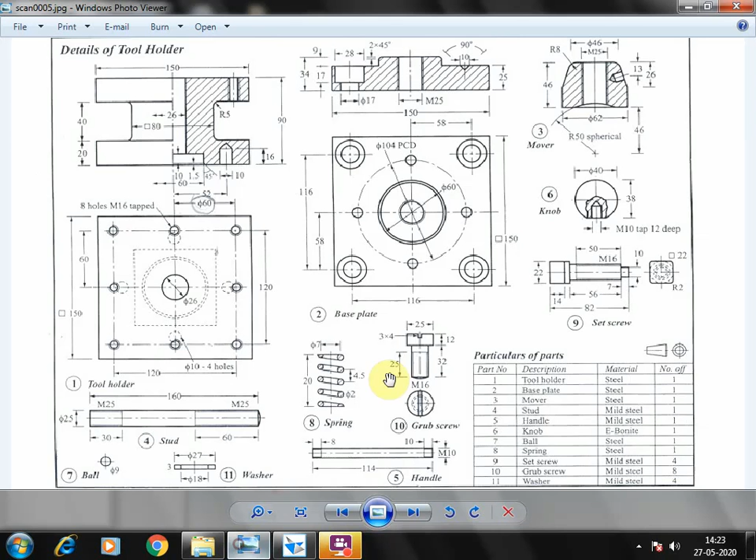Okay, so now I am going to start. Go to the solid part. So here I am going to the protrusion, revolved protrusion, select what is the value. So in the dia, in the bottom, so what is 62, up to the total height is 46.

The tapered length is 26 mm, middle is 25, so 46. So I am going to select a plane, front plane. From here to select a line. Then what is the 62? So 31, and going to make a line.

So okay, I will do after. So what is the next height? 46, and towards right I think 45, that also 46 and 26 mm length. So 46 means 23 now. So here to going to make a straight line in the distance of, so 46 minus 26 remaining is 20. So I am going to make 20 over here.

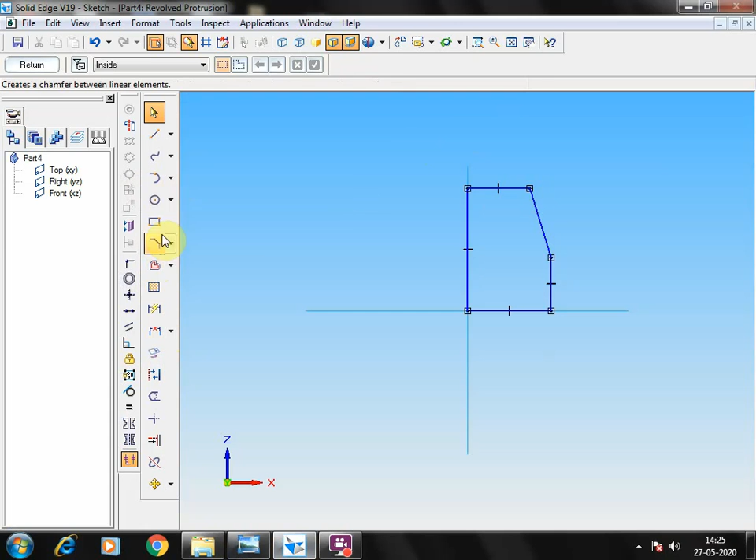As after that I am going to join. Now the top end they are making radius 80. Radius 8. So go to here, select fillet option, this as well as this. I am going to give radius as 8.

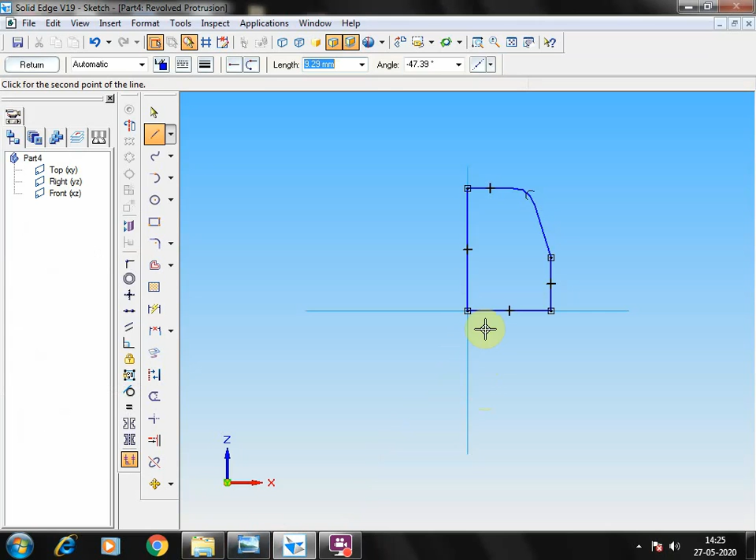So after giving this, once you see in the middle, it will be the straight tapered hole, so that I am going to select line from here to what is the tap 25, M25, or otherwise finally we can use with the hole option. So this is the basic step we have to do.

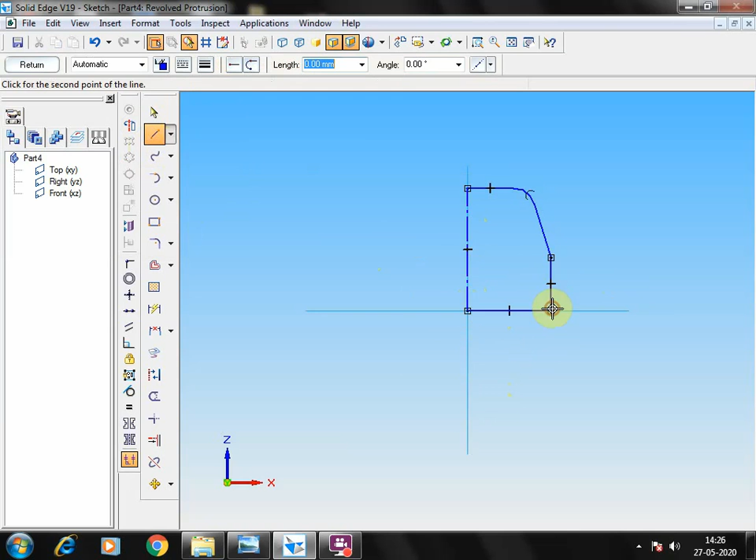Select axis of revolution in the mid, give return. So it's not joined, I think, properly. Select a line from the end, from here to here, then give return, 360. Okay, after giving 360, go to the hole, the top hole, threaded hole, go to here, threaded, having 25 mm diameter.

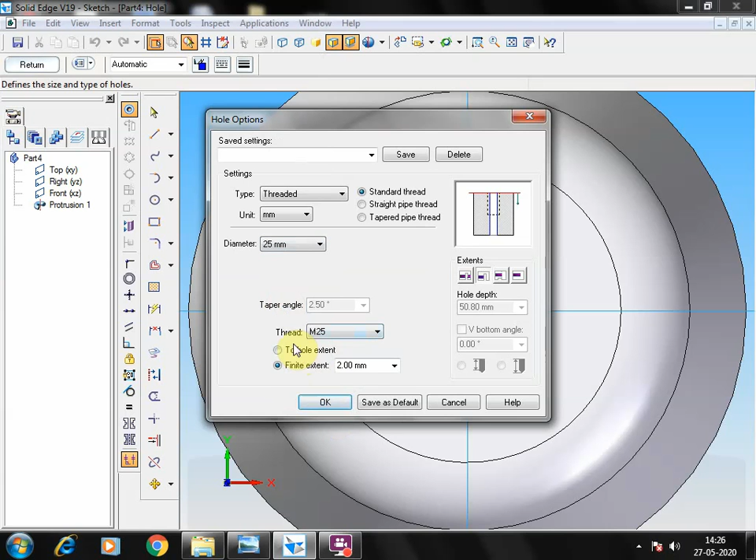So 25 mm diameter, threaded to hole extent. Okay, through next return, left and right click. So the tapered threaded hole created.

Then comes to the next one, this spherical radius 50. Okay, so from here to the center is 46. So go to here, select revolved cutout, select mid plane, from here to 46 mm distance, then select circle having the diameter.

Not diameter, radius 50. Then I'm going to do one more step. So extend to next.

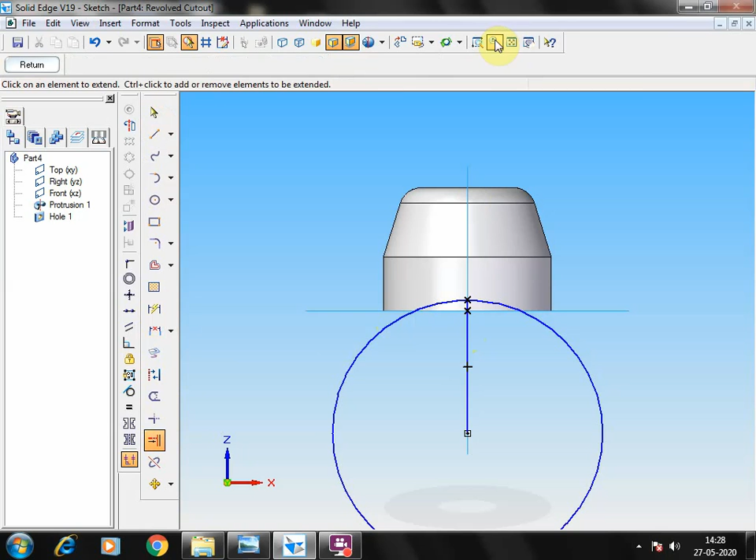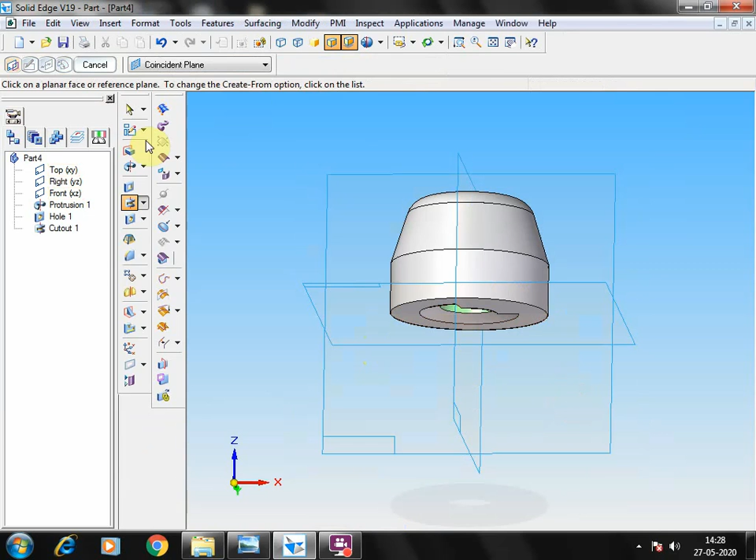Go to here, zoom option. From here to I'm going to make a straight line, so the remaining lines I'm going to trim. Now select axis of revolution, this 360, and those particular area is created. So only off.

So go to edit profile, return. So angle I can give 360, left and right click. So this is the surface I have to create.

So this part name is mover. Going to save.

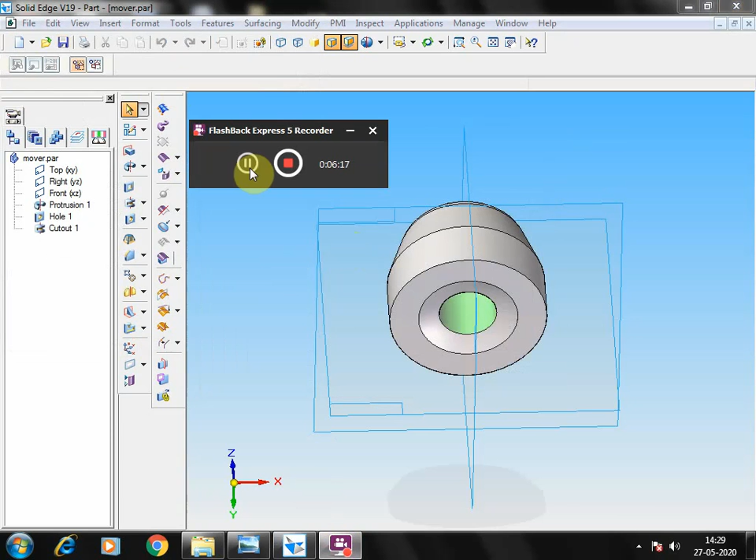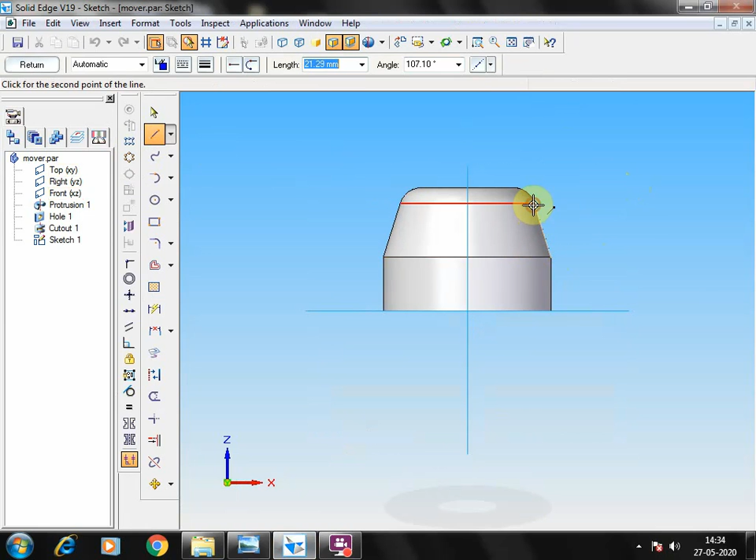So after this we are going to make this hole. Okay, so for this I'm going to go to the sketch option and to select this particular plane. I'm going to draw this line towards here. So what is the thing you have to remember? From top to 13 mm distance, as well as this axis of hole is perpendicular to this taper angle.

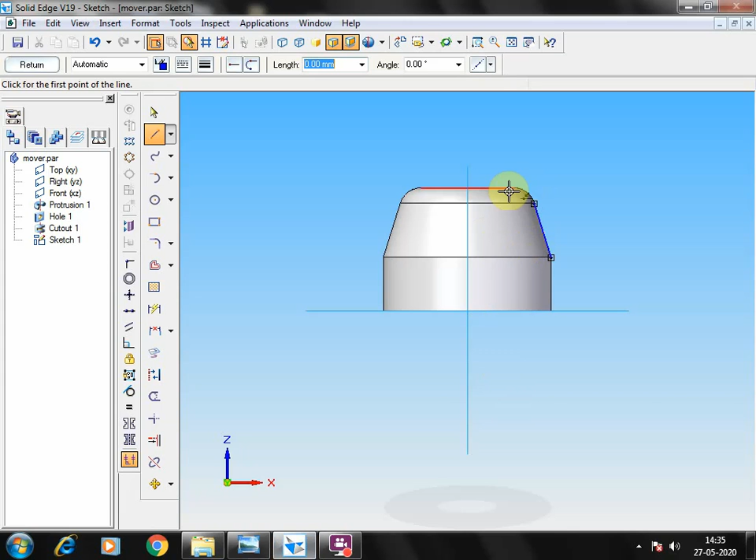Okay, so that's what. So I'm going to make a line, straight line from here to 13 mm distance. So straight line, going to select trim, going to cut over here.

Now I'm going to check what is the angle of this, 107. 107 plus 90, 197.10. So from this end to angle I can type 197.10.

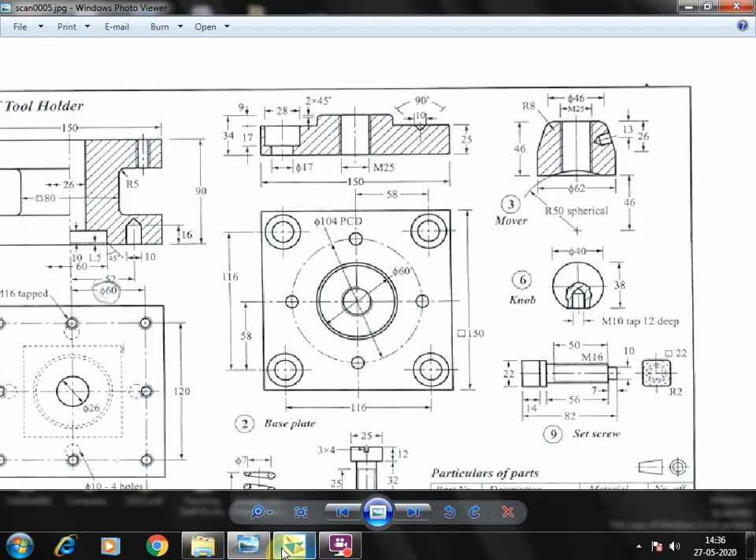197.10, and length, depth of the hole, diameter or length of the hole, length of the hole, now. So here the hole depth we could not able to find out with help of this drawing.

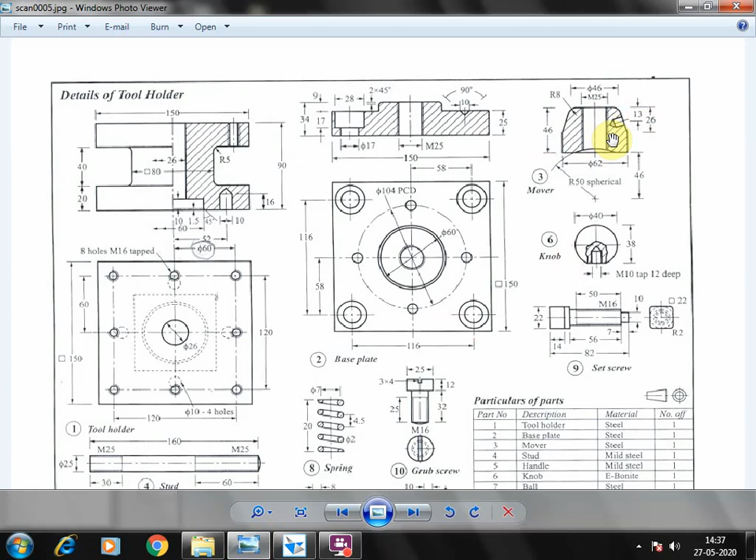So now here we are going to insert the handle. Okay, so those handle length, so here, so that comes as a 8 mm distance. This side is 8, so other side 10. So those it will be going to join with here 10 mm. Okay, so this length you should join with, make it as 8 mm.

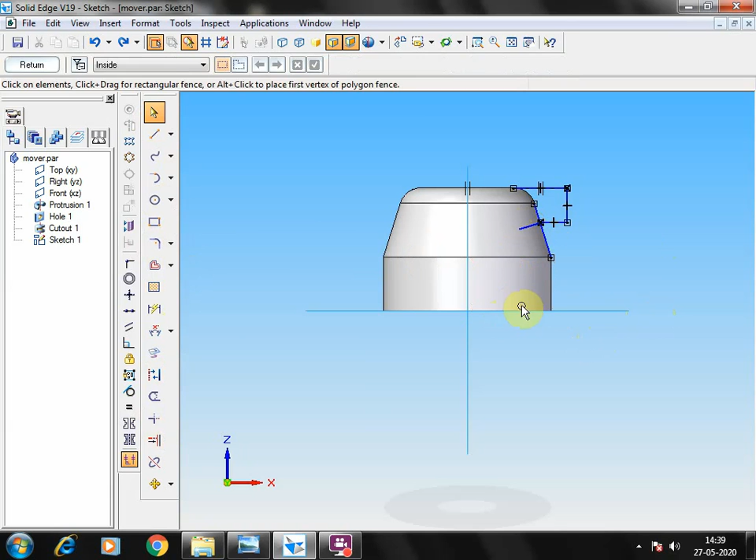Okay, so select a line from this end to 8 mm and 197.10. Okay, so now we will going to check the angle. So the angle between this and this is not exactly. So angle of this line.

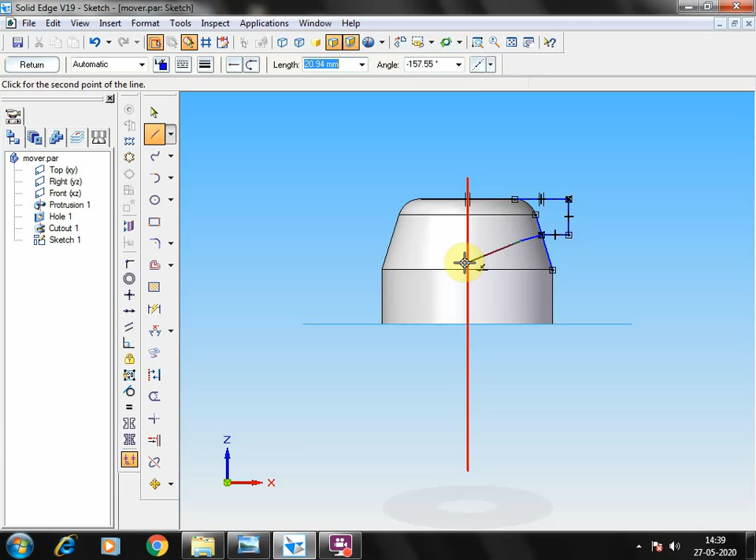So select zoom option, sorry, here the angle it could change. So select, delete line, 8, 197.10, 197.10.

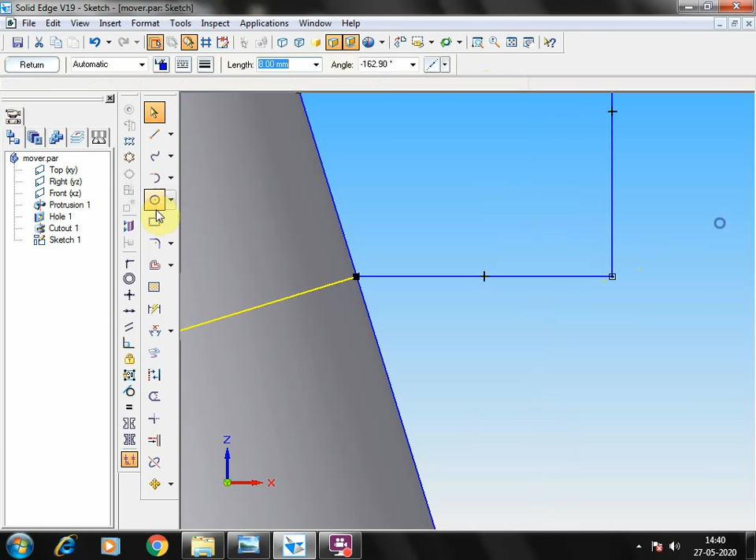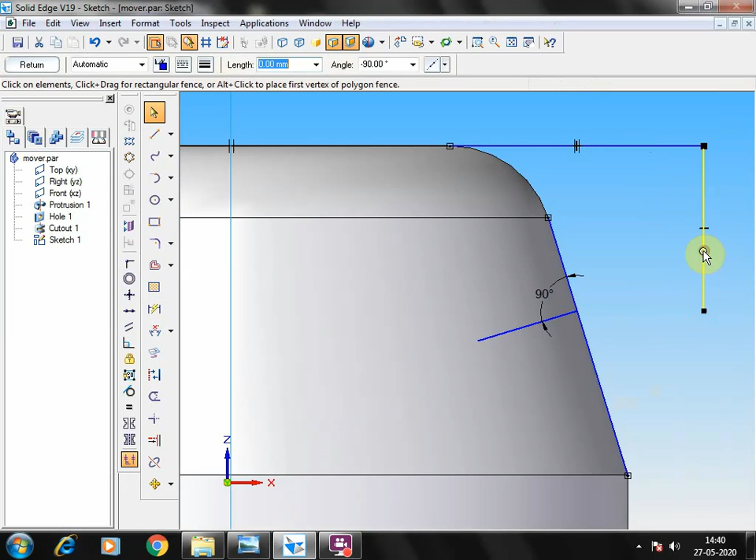Okay, so it is minus 162. Then comes to here, check the angle, so 90, so it's correct, whatever things we have drawn. Then finish, and actually I'm going to edit those things because of this line and all.

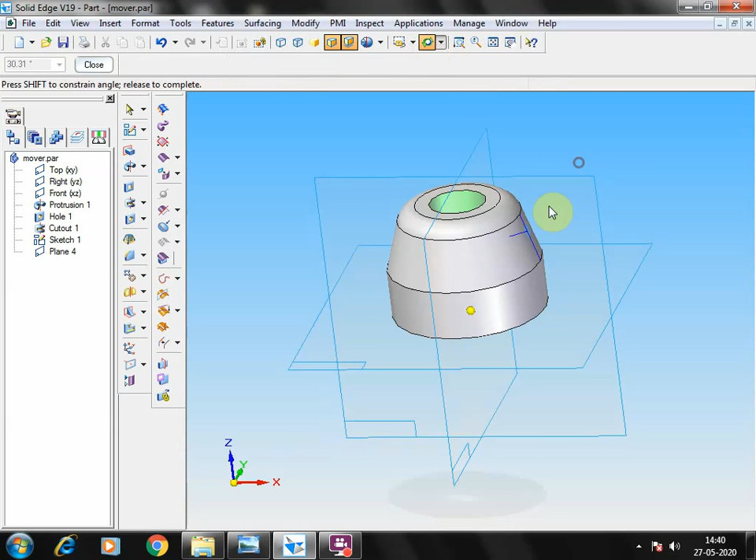I don't require this as well as this now. So the newly created plane line, I'm going to create the new plane like plane normal to curve from here to this end. I'm going to keep. So after that, rotate, select, zoom the particular area, and going to draw the whole circle with the help of sketch.

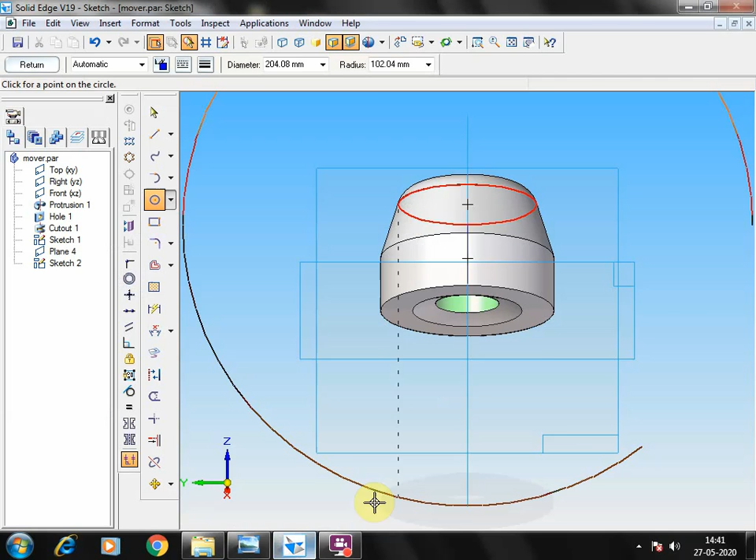Select a circle exactly this end. I'm going to make the radius, dia is 10 mm, because here it should full 10 mm, so 10 mm. Then return, so mismatched. So please be careful while drawing this.

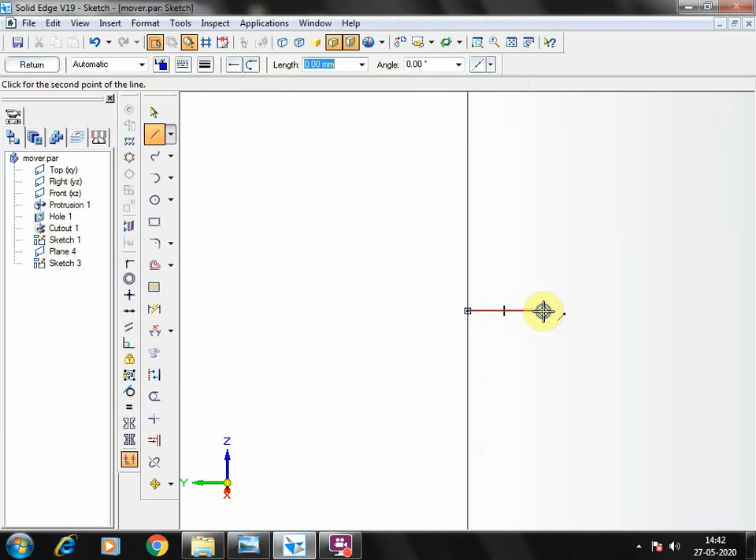So sketch I am going to delete, go to here, select sketch plane. So this is the particular point. Okay, so for reference I draw in a small line, select a circle from exactly here 10 mm, then fit.

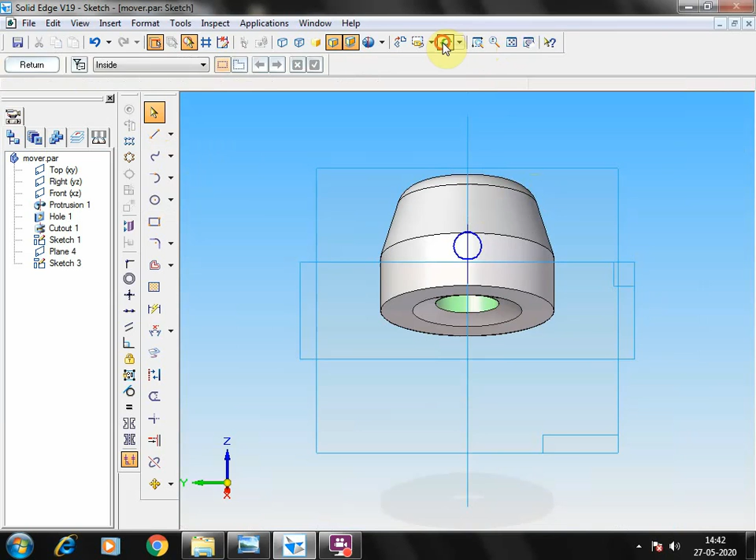Zoom, so those line going to delete. Okay, so now we will check. So exactly in the particular line we drawn. Then comes to here, return, and goes to

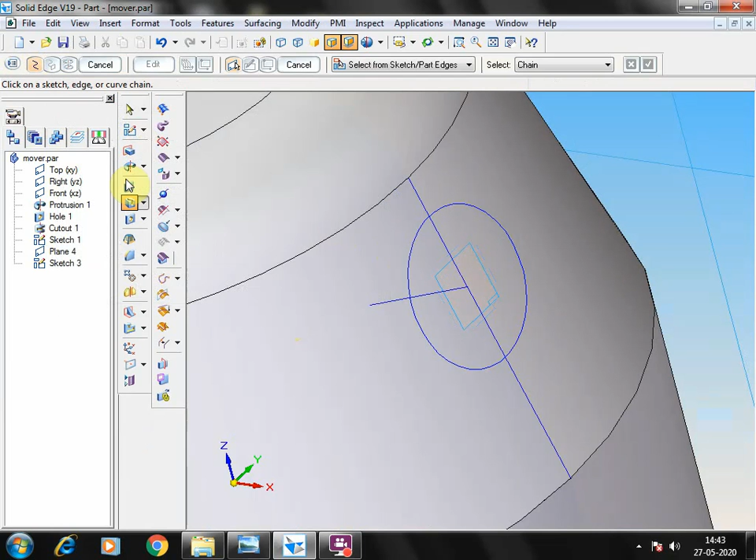threaded swept cutout single path. Okay, now select the guideline. So this is the guideline. Enter profile this. Okay, okay, so full on right click. Otherwise you can select the whole option, we can do also, it's not an issue.

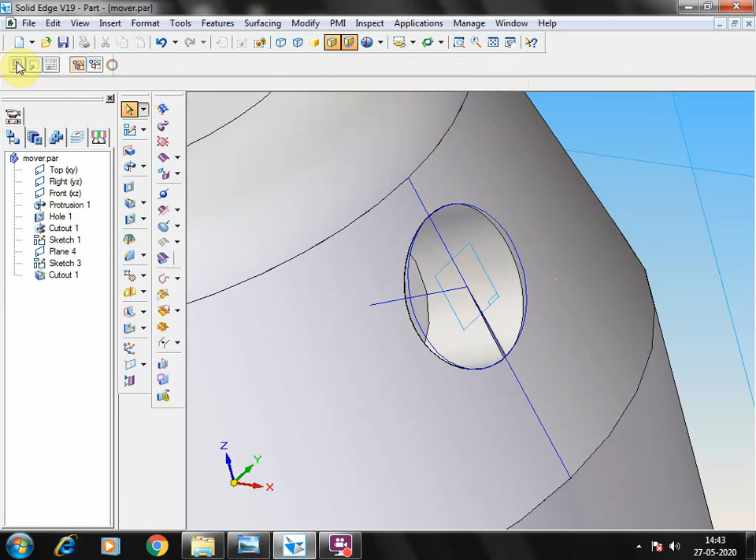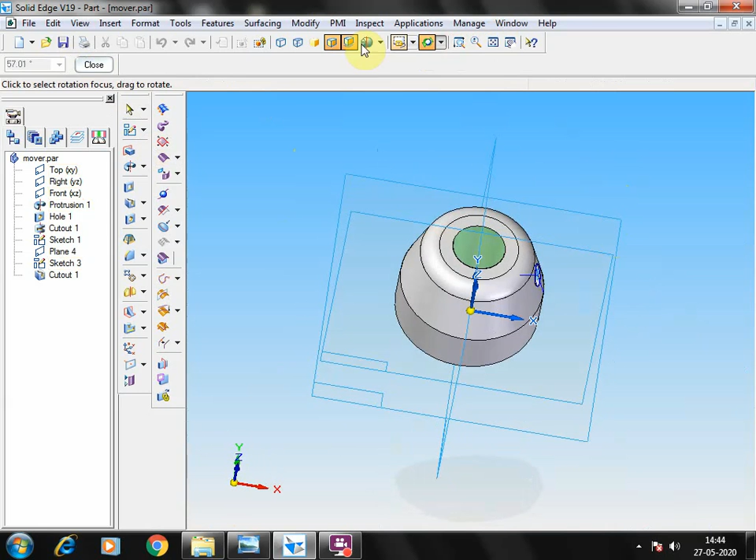So then we can save the component. So in this one, this is the only thing somewhat it is difficult. Okay, so once if you done this, okay, save and close it. Save and close the component. Then comes to the next, fourth one, stud.

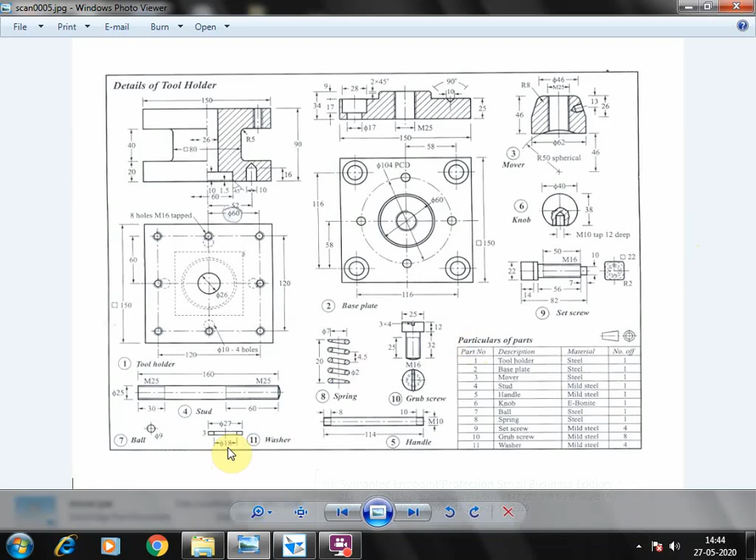So select solid part, protrusion, go to here, select by 18, select a circle from here to 27 mm, 27, return. So this depth is 3 mm.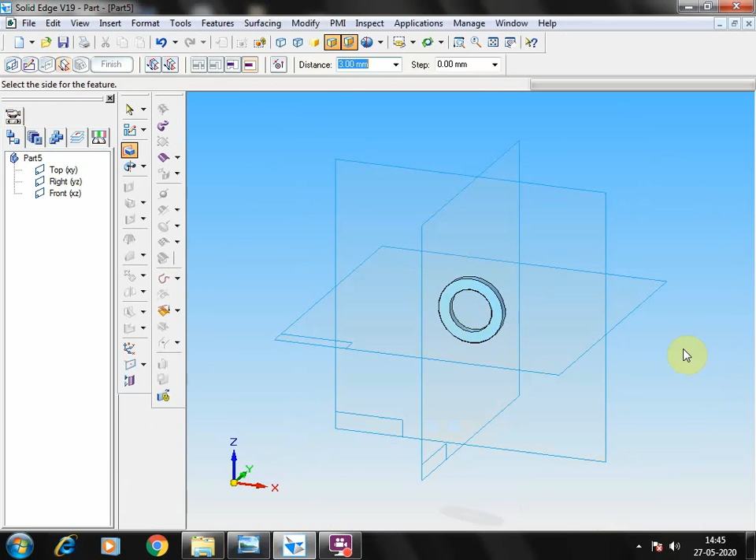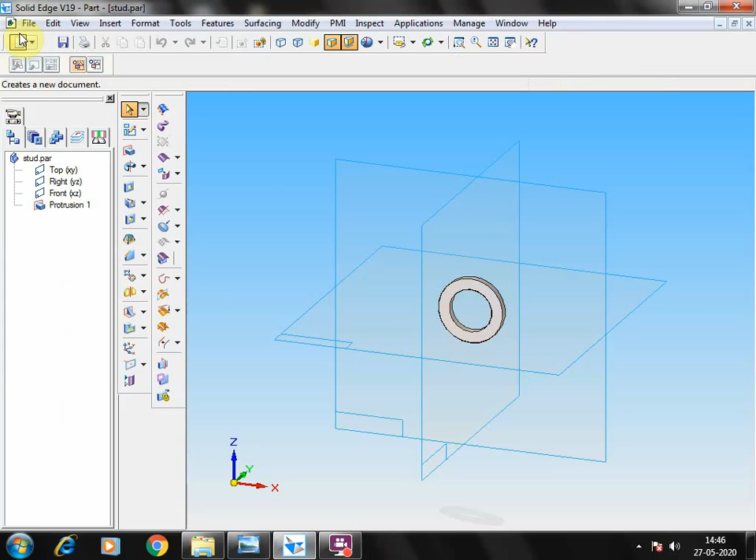Okay, so save as stud. Save as stud. So this is washer. Okay, so we can save this as a washer. Set here washer. You can save, then close, go to the solid part.

Stud is this one, so that is by 25 mm hole up to the length of 160 mm. Select and 25 mm circle, depth is 160. So this what happens if you are not possible to make this and this area only the threading, so all the area we can get.

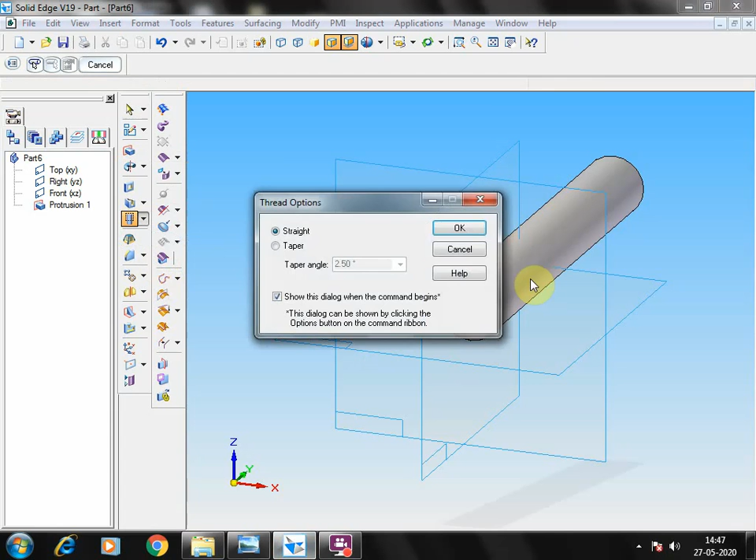So go to here, I'm going to select thread option. Okay, from starting from here, first I'm going M25, so 25 mm and length 30, so 30 I'm going to give finite value 30, even though it has to be select, so it's not an issue. You can save as stud, stud, save.

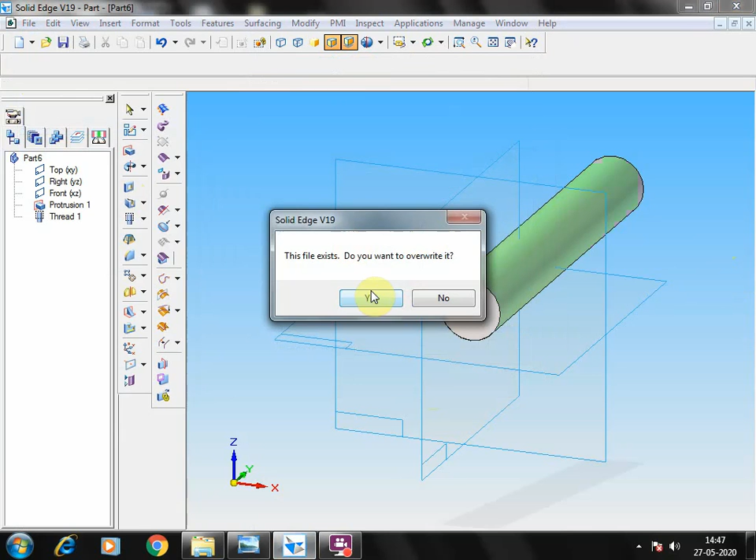Then comes to the next part after the stud. Fifth one is the handle. Where is the handle? So this handle diameter is M10 and 114 mm distance. Okay, so go to here, select protrusion, M10, so 10 and return.

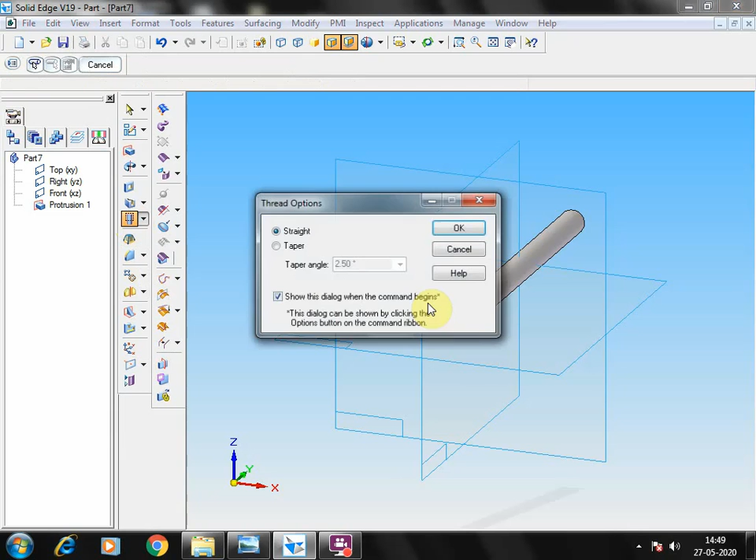114 mm distance, and going to select thread, give from here to 10 mm distance, finite value 10 mm, it's coming, so it's not an issue. So save as handle, and save and save. So handle is over.

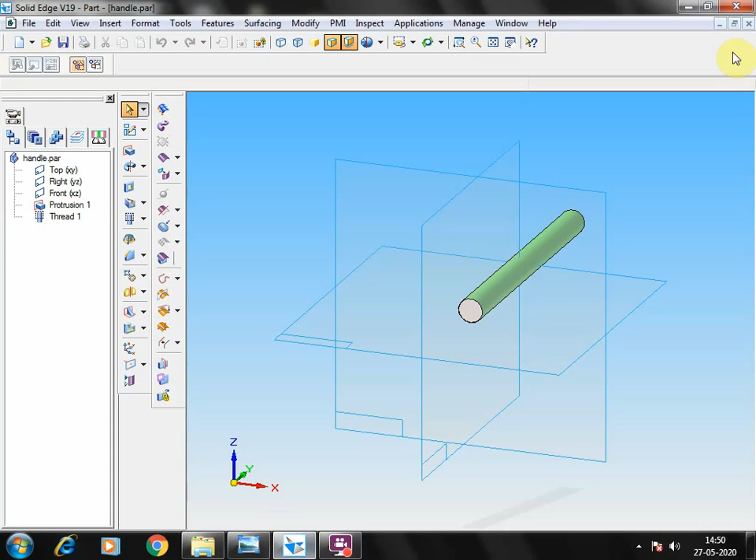Then sixth, so for the sixth knob, so sphere dia is 40 mm. Go to your solid part, select protrusion, not protrusion, revolved protrusion, select, and from here to draw a 40 mm circle, as well as from top to 38 mm.

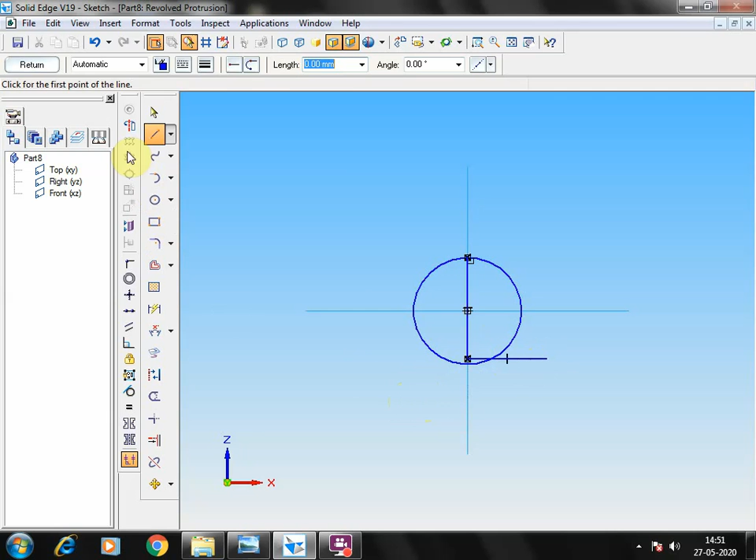38, and towards right side draw a line, as well as going to trim the particular area. This is the thing. Okay, now going to give axis of revolution, this return, 360.

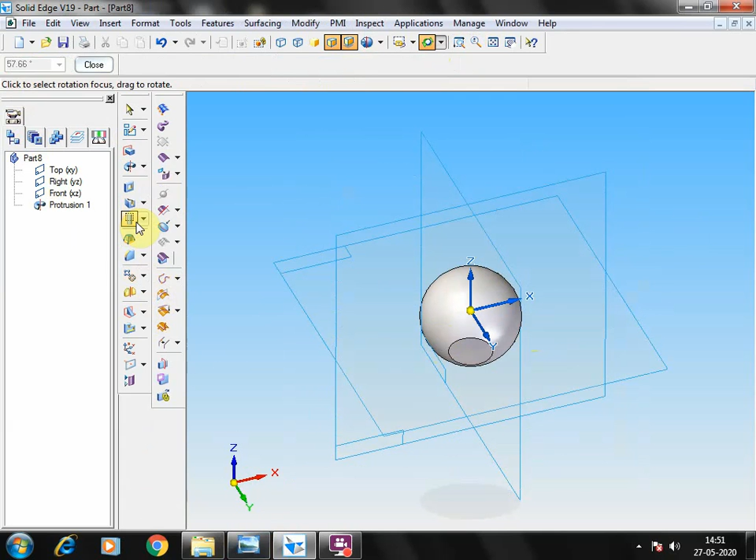Okay, so like this we have to create this particular part. Then goes to here, select hole dia 10 mm tap, 12 mm deep.

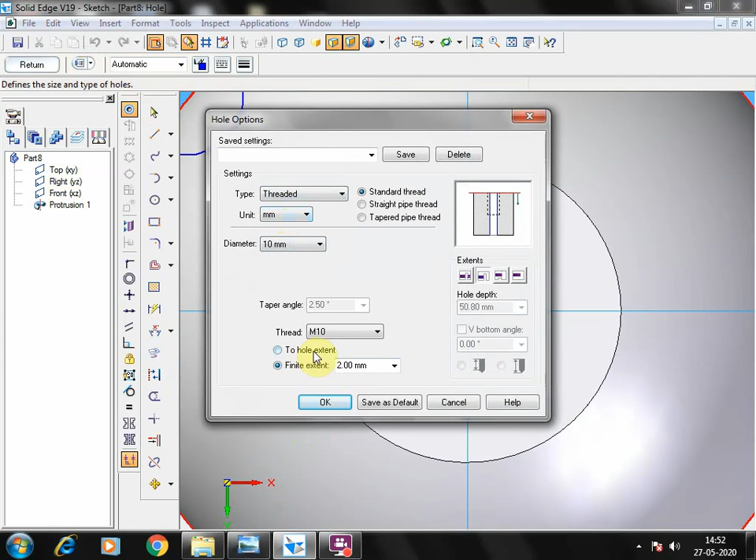Okay, so go to here, select. Actually this is the threaded hole, threaded 10 mm distance, and to hole extent, hole distance is 12 mm. Bottom, okay, 180. Keep going to place over here, then give return towards up, left and right click.

So this is okay, knob. I'm going to stay as a knob. Okay, this is over. Then comes into the next part after the sixth.

Seventh one is ball. So ball diameter is phi 9. Go to here, select solid part and revolve protrusion, and select a circle 9 mm and make a straight vertical line, trim it, the remaining portion. So go to here, trim.

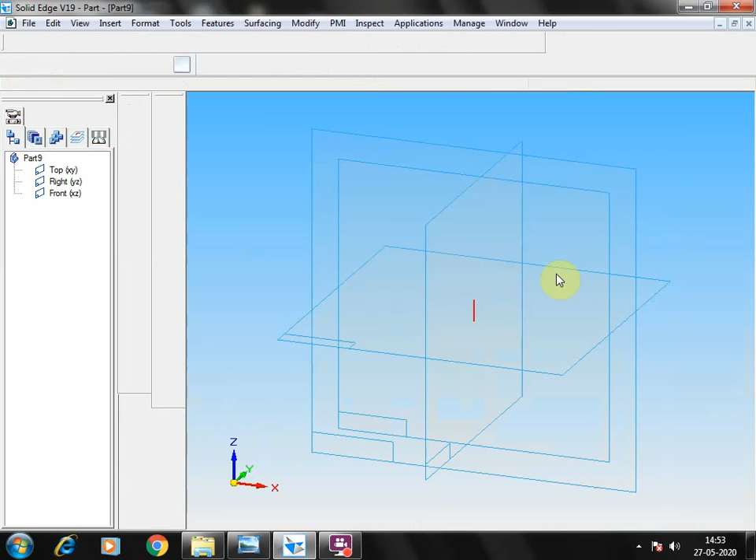Now select axis of revolution as this, return 360. So ball is created. So save as ball, BALL ball. Then comes to the next one after the ball, eighth one is the spring.

So for to draw the spring, please check the diameter of the spring is 2 mm, the distance is 4.5, 20 mm, the total distance is 7.

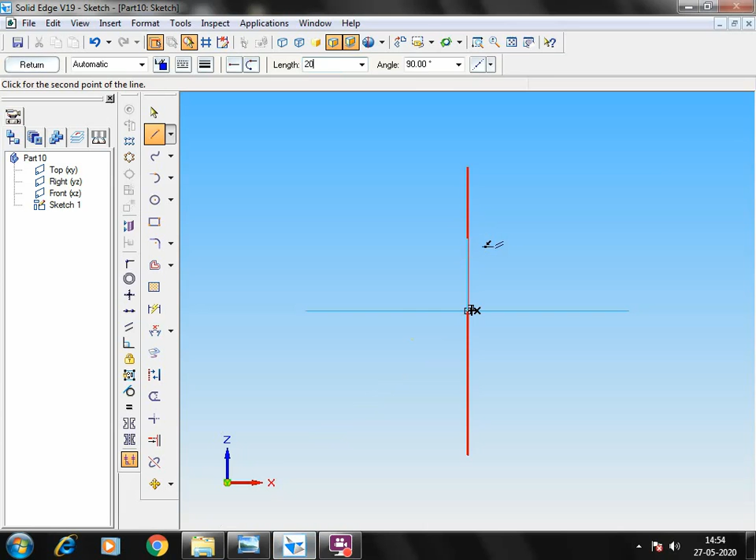So for this I'm going to solid part and sketch from here to the distance is 3.5, because in the 3.5 only the ball is coming. What is the height? Height is 20 mm. So 20 mm height, I drawn the line.

After drawn the line, select a circle. So this end phi is 2 mm. Okay. After that, this line I'm going to delete.

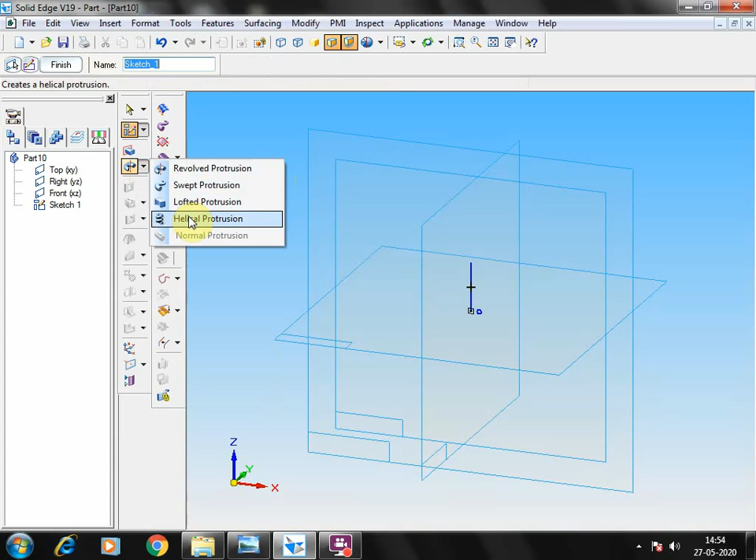Then coming up. So now go on, select the helical protrusion command. First I am going to select the profile and axis, then starting point from here, and pitch. That pitch length is 4.5. Okay, you see the preview and give finish.

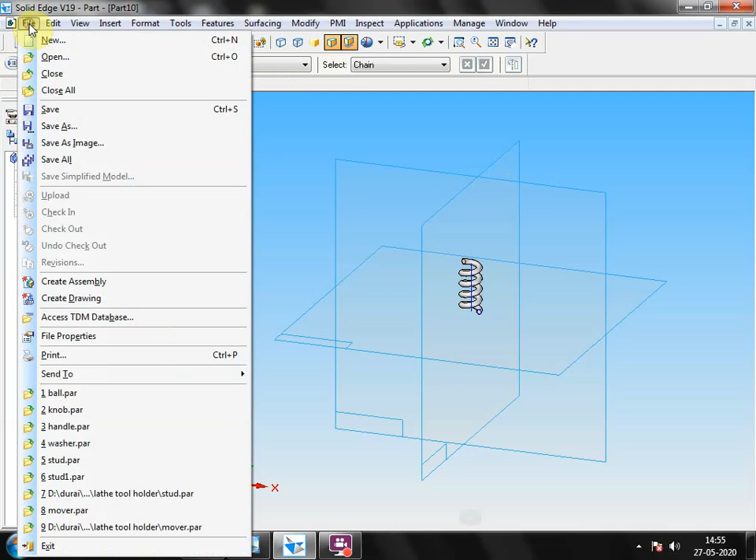So like this way we have to draw the helical protrusion. Helical, say one helical protrusion.

The next one is set screw. So set screw, the initial here will be a 22 square up to the length 14 mm. So go to here, select solid part, protrusion square 22. Select a line from here to 11.

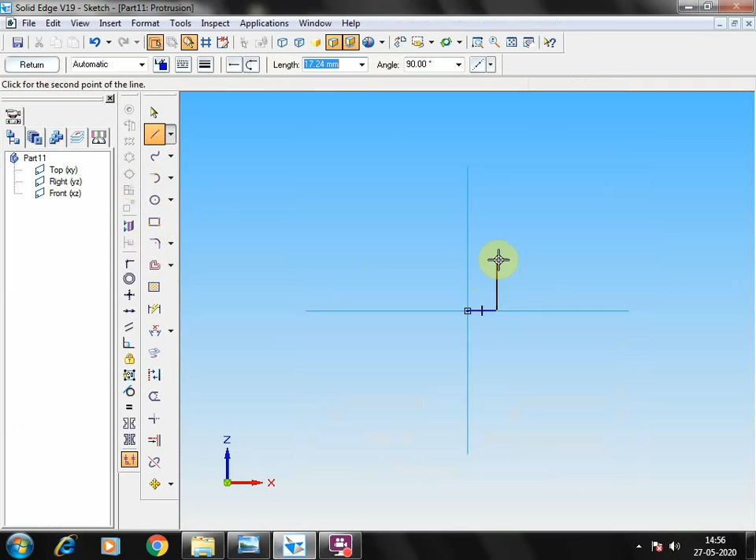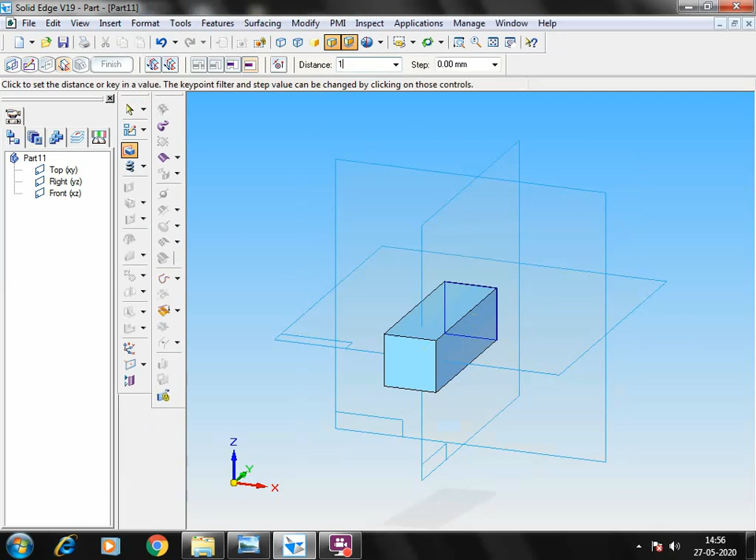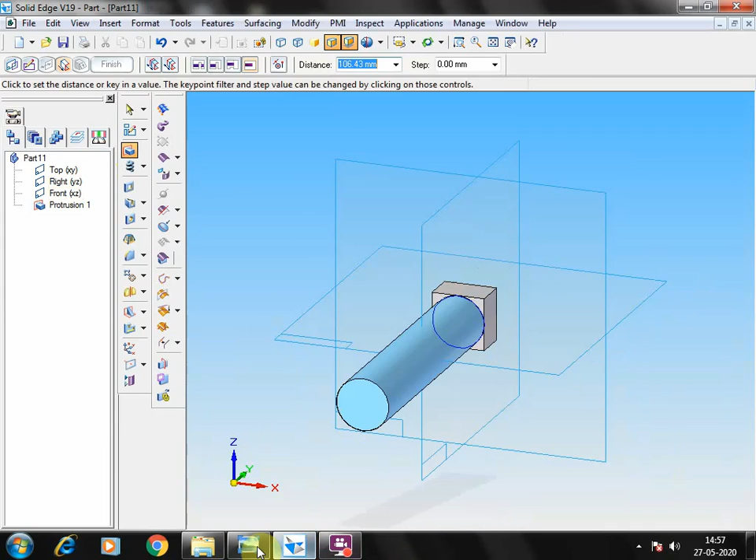Go to here, select protrusion, select this portion, circle having the diameter of 22. So that depth, what is the depth? This is 82 minus 14 minus... 82 minus 14 minus 7 minus 56. So 5 mm depth. That cylindrical part is coming.

So this I am going to save as a set screw. Set screw. Then what is the remaining portions? So up to 56 mm.

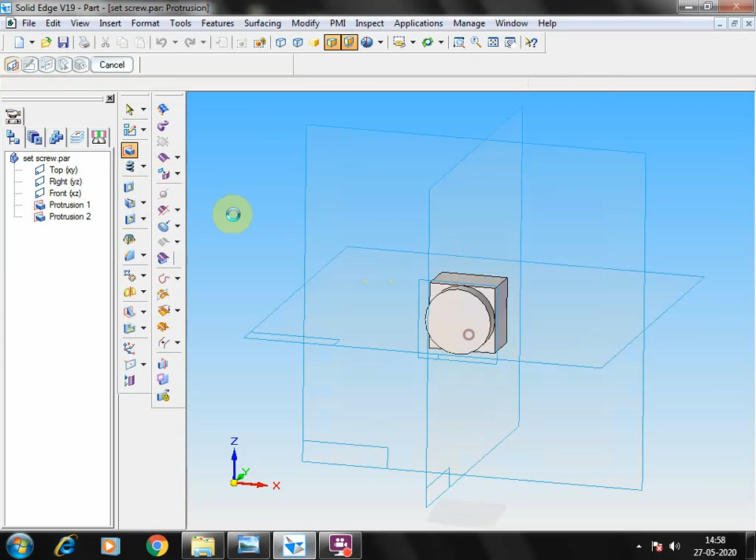M16. Select protrusion and 56. Sorry. Up to 16 mm 56. 16 mm. Return.

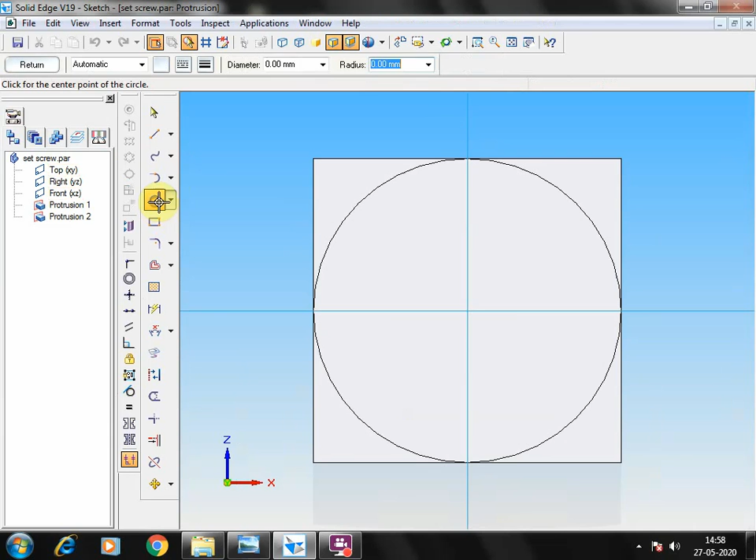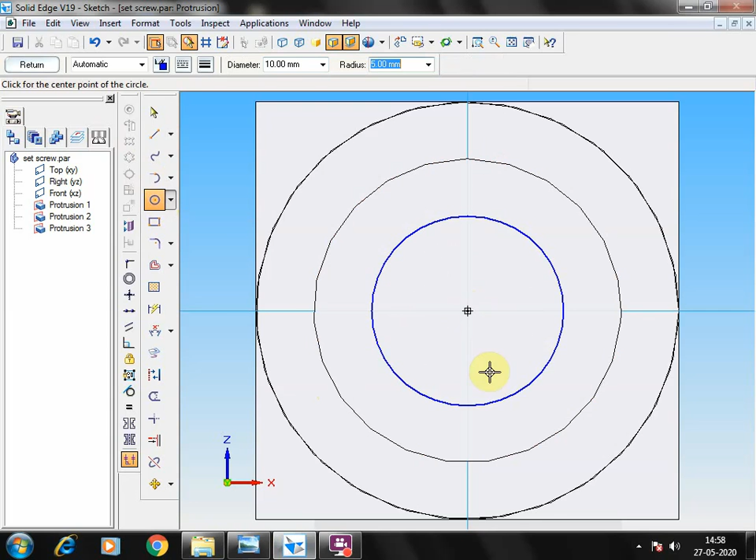Select protrusion here from here to 16 and return 56 mm. Okay. Then again last one, that is the small 7 mm, 10 mm, 10 mm dia, 7 mm distance, 10 mm dia, 7 mm distance.

So here you go to hole thread. Okay. This starting from here, finish. That's so you can say this has to be over. Then the last part.

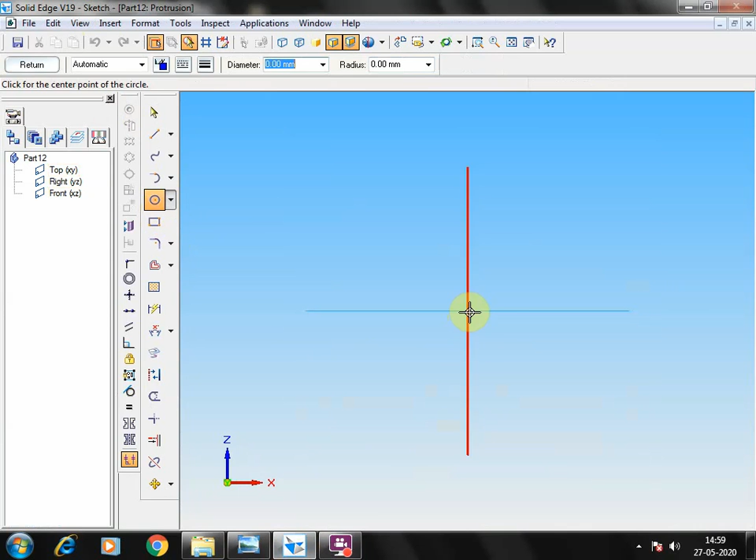9, 10, grub screw. So this grub screw having the diameter 25, 16. Go to here, solid pot, that is 25. Return and what is the diameter 12, length 12, depth 12, and comes to select protrusion again over here.

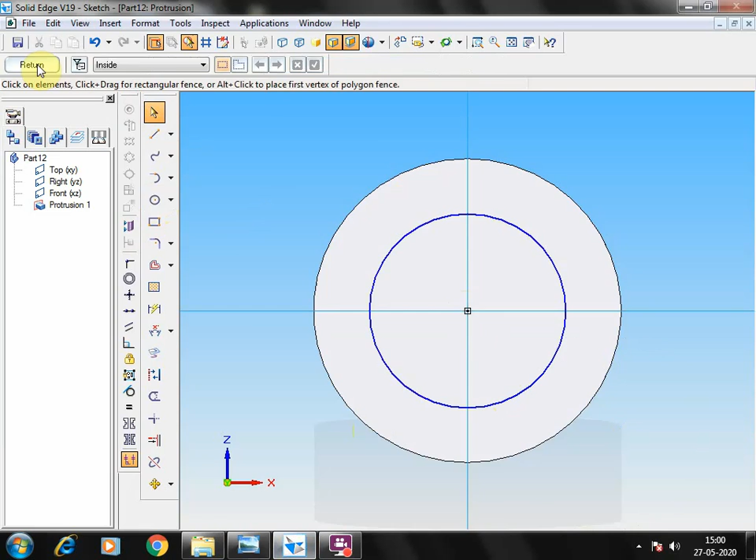16 mm, 32 mm distance. Select 16 mm and 32 mm, 32 mm. So this portion has to come as threaded, starting from here, left and right click.

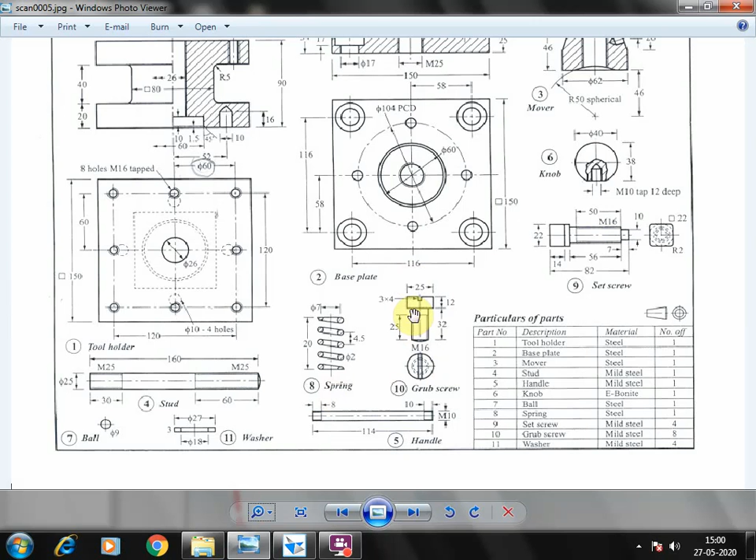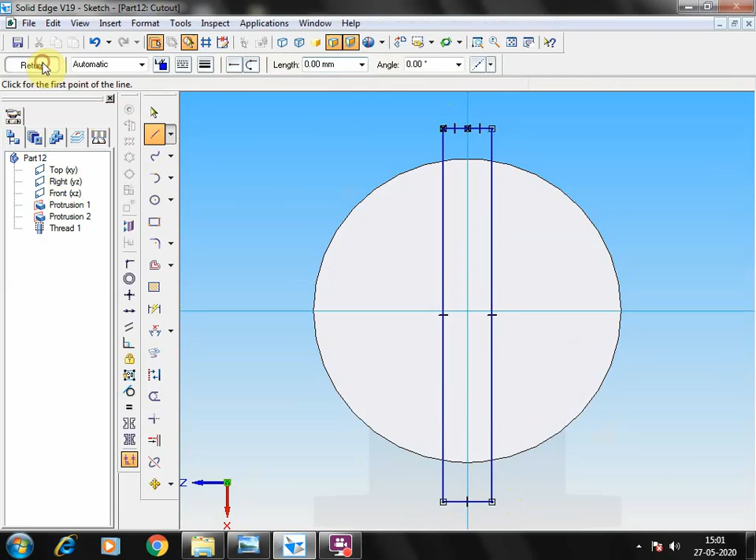Now rotate. So cut out, to cut out. So 3 into 4. Going to select top from here to 4, and depth I am to give 3 mm. Okay, so like that you have to do the grub screw.

So with that this thing is over. See and stop. The next video you will see the assembly.